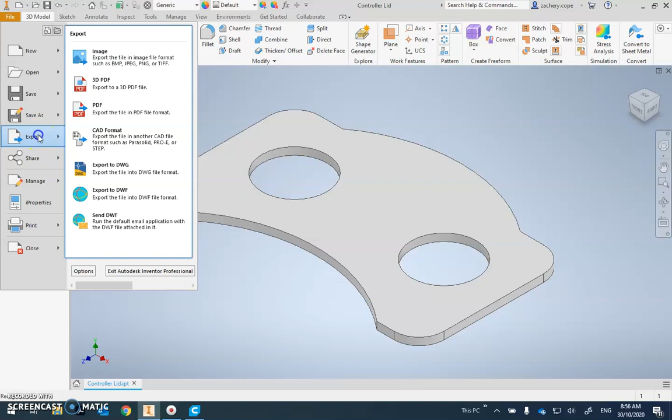Open your Inventor file, click File, Export CAD Format, change the file type to STL, click Options, change the units to millimeter, resolution to high, click OK. Give it an appropriate name, click Save.

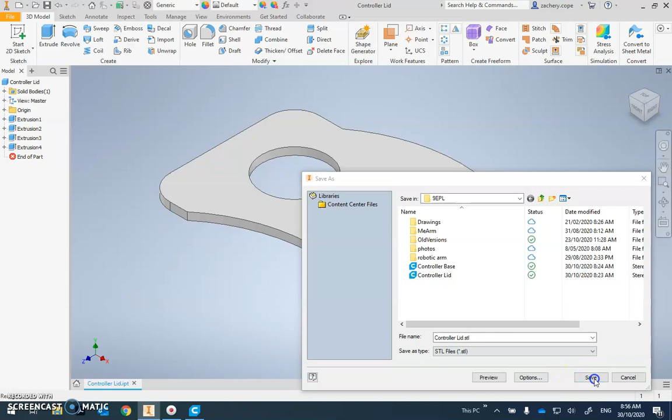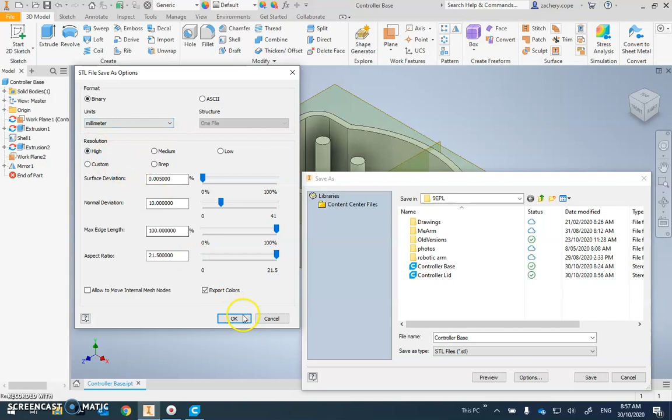Repeat for your other part. File, Export, CAD Format, file type STL, Options, units millimeter, resolution high, click OK, click Save. So that's complete from Inventor.

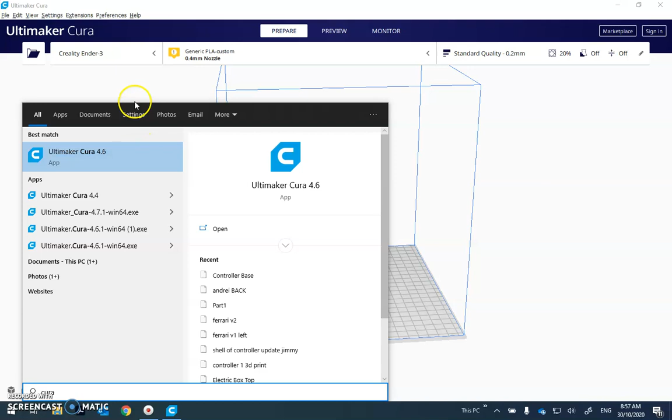Next up, you want to open up Cura. So that's Start, and you might have it installed already. So Cura 4.6 is which one we're using now. When it loads into the screen, make sure that you select the correct 3D printer. So either the Ender 3 or Ender 3 Pro, or you can add a printer if you don't have one already. So non-networked.

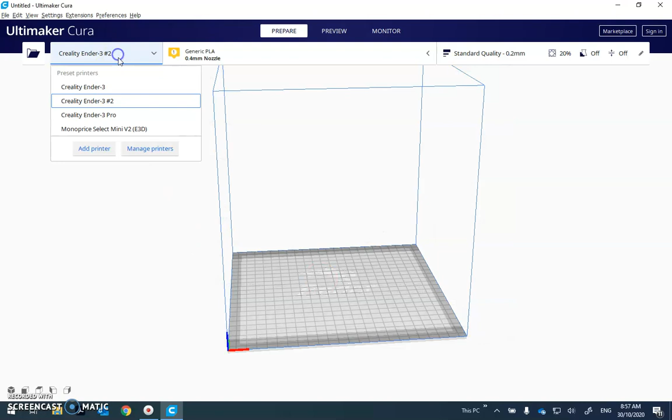So Creality, and select Ender 3 or Ender 3 Pro and click Add. Click Next. Okay, so now you can select your printers up here. You can change the material here. We're using PLA. In particular, we're using eSun PLA Plus, and you can select a color such as black, white, or purple.

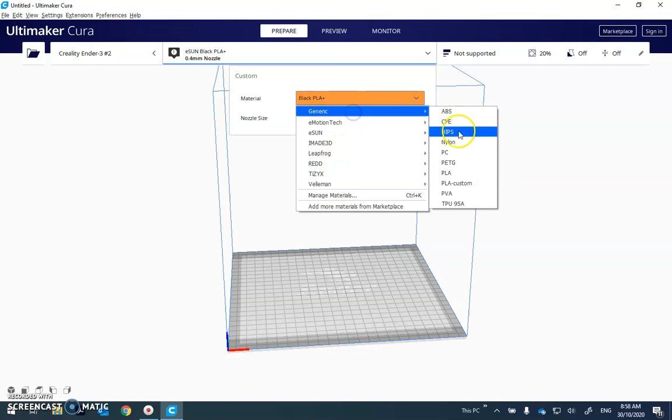Okay. Down here, you can change some settings. So profile. This is the layer thickness and the infill. If it doesn't give it to you, it's because the settings are blocked out due to the plastic choice. If you change your plastic choice to say a generic material, you can then change the profile.

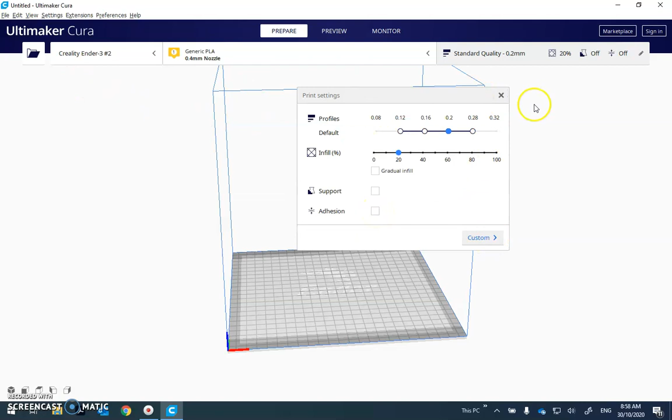So the profile is the layer thickness. About 0.2 is going to be fine. Change your infill down to between 10 and 20%. You don't need support. Sometimes you might need it. Adhesion, you don't need that. Close that out. Click on Open. Find your file, so Controller Base. Select your file.

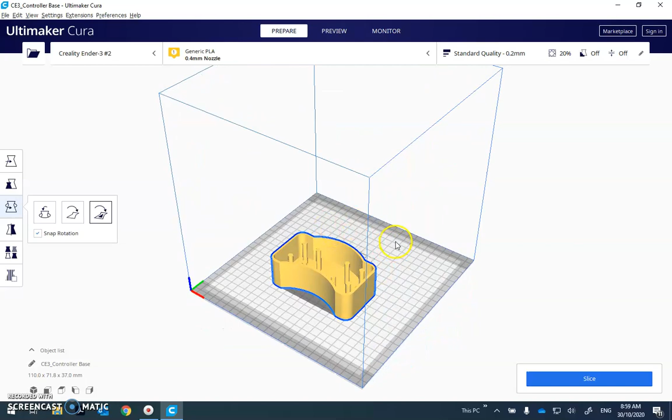Change to Rotate, and click Select Face and select the bottom of your surface. To rotate in the screen, you right-click and hold down your right mouse button. To center this in the screen, you right-click and you go Arrange All Models. You select Slice. This will split it up into layers of 0.2 millimeters. 6 hours and 43 minutes is how long this will take to print.

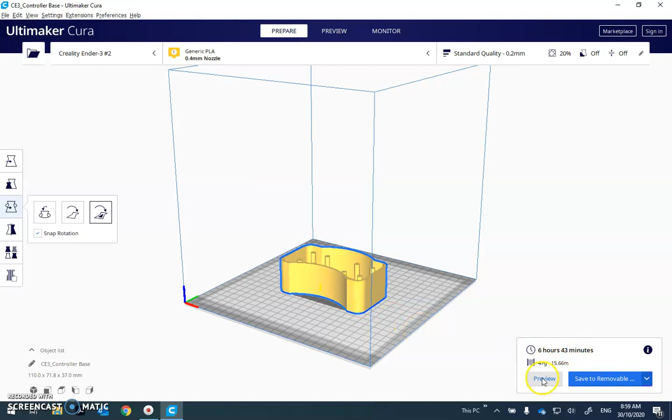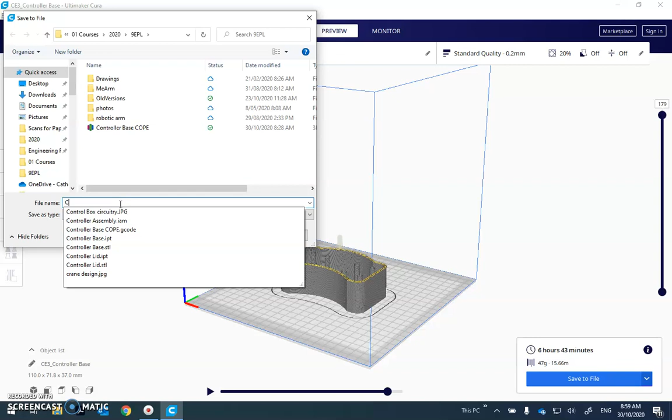You can click Preview, and on the right hand, this slider will show you kind of how it's going to slice the model. This one shows each layer, what the printer is going to do. When you're ready, click on the drop down arrow and click Save to File. Give it an appropriate name such as Controller Base Cope and click Save.

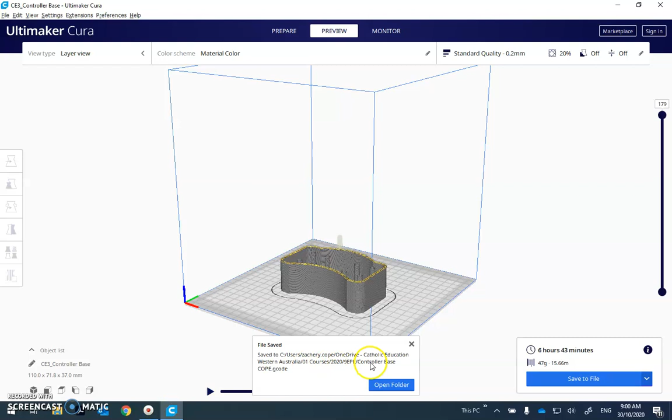You can click Open Folder and you'll find your file should be there, and it should be a G-code file. This one you want to drag onto the USB and then plug it into the printer. And that's it. To change your model, you select your model, hit delete, and you can load. So let's close that out. Back to Prepare, and you can load a new model. So the lid, click Rotate, go around to the back, select the bottom, right-click, Arrange. The settings here are the same, and you can slice it again.